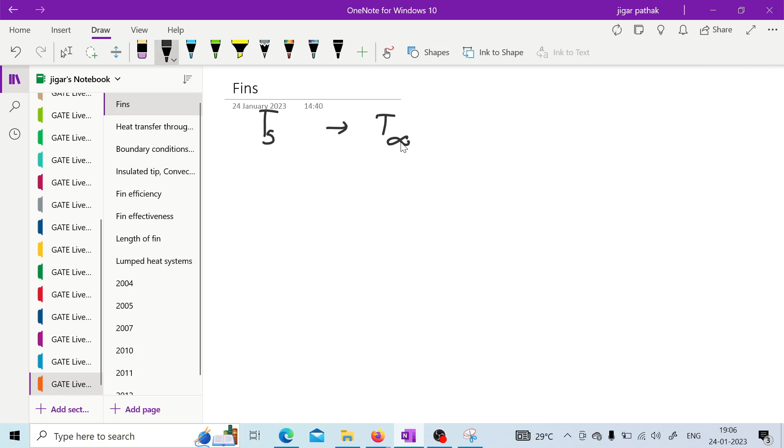As you know, in heat transfer, whenever we are considering convection, the rate of heat transfer from a surface at a particular temperature Ts to the atmosphere, let us say it is at temperature T infinity or T atmospheric, is given by this simple formula: H A delta T, where delta T is Ts minus T infinity.

Now, whenever we want to increase this heat transfer, the options with us are very limited, because Ts and T infinity are pre-decided. We cannot change that. So what we can do to increase the heat transfer is increase this heat transfer coefficient, or we can increase the area.

through which heat transfer is taking place. Generally this increase in H is also not convenient every time, because in case of convection, if we are dealing with gas, then heat transfer coefficient is very less. So in order to go for high heat transfer coefficient, we need to provide some pump or something like that. We need to provide some assistance.

In natural convection, this H is very less. So the only option we have is to increase this area. For that, extended surfaces are used. These extended surfaces are nothing but fins. So this is how fins are important in heat transfer.

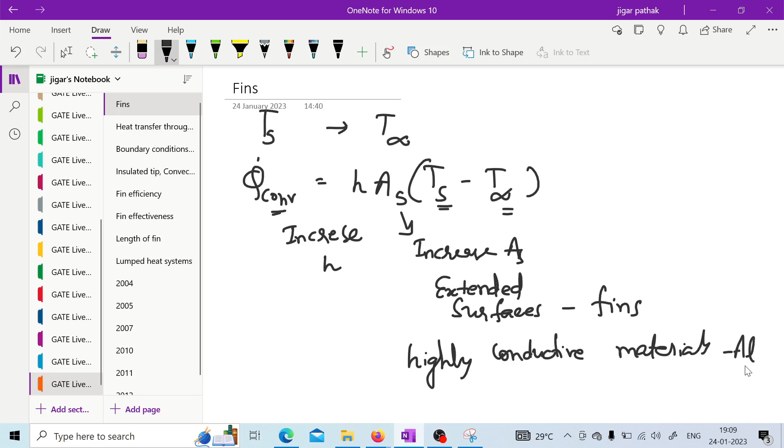You must have seen that engine, or cylinder of that engine, which is surrounded by fins, to increase the heat transfer. Generally these fins are made up of highly conductive materials, like aluminum.

So now if we consider the heat transfer in fins, as you can see here in the given figure, what we can do is we can assume a particular element at a distance x, of length delta x. Then the heat transfer in this particular element is: whatever conductive heat transfer has entered this element at distance x will be transferred to the heat conduction at x plus delta x, and the remaining will be convected to atmosphere.

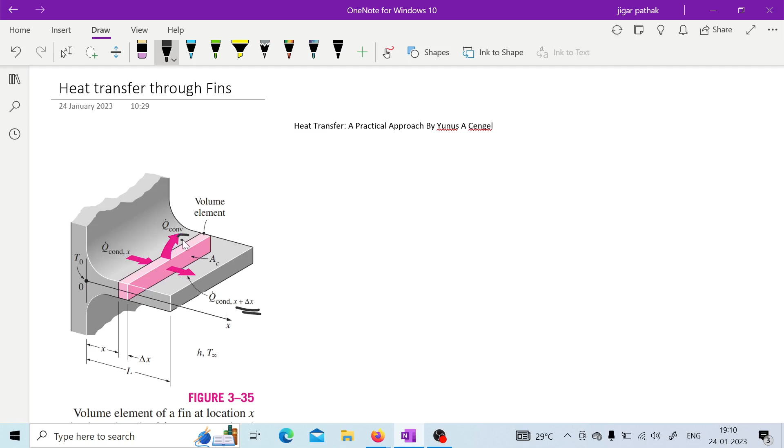So if we write this heat balance, then this Q conduction at x will be equal to the heat transfer rate of conduction at x plus delta x, plus Q convection. So this is how heat balance can be written in this particular case.

Now as we know, this convection is given by H A delta T, where A is nothing but perimeter into this particular length delta x, and here temperature difference is T minus T infinity, which is that atmospheric temperature.

So if we put this value in the above equation, then we will get something like this: heat transfer rate of conduction at x plus delta x, minus Q conduction at x, divided by delta x, plus h p (T minus T infinity) is equal to 0.

Once you have this relation, you can consider that delta x is almost 0, or limit delta x tends to 0. In that case, you can rewrite the above equation as dQ conduction by dx plus h p (T minus T infinity) is equal to 0.

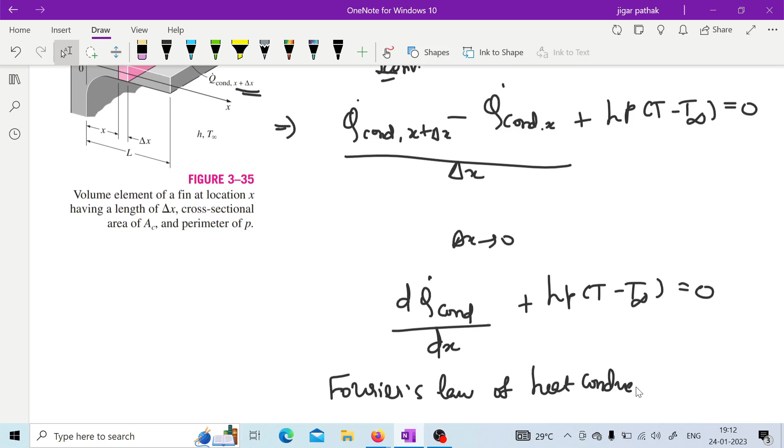So here, what is this conductive heat transfer along the fin? That can also be derived from Fourier's law. What is Fourier's law of heat conduction? Can anyone tell? Q equal to minus k, dT by dx.

As we know, so from that Fourier's law of heat conduction, it can be given by minus K Ac dT by dx. This heat conduction is nothing but K Ac dT by dx. Now if you put this value into the above equation, then you will have something like this.

Now in this equation, generally fins may be of varying cross section as well as varying perimeter throughout its length, but if we consider this cross sectional area and perimeter constant, then this equation can be simplified.

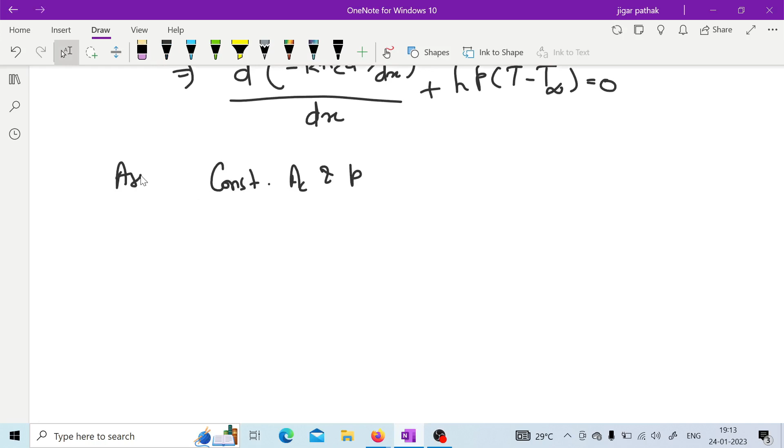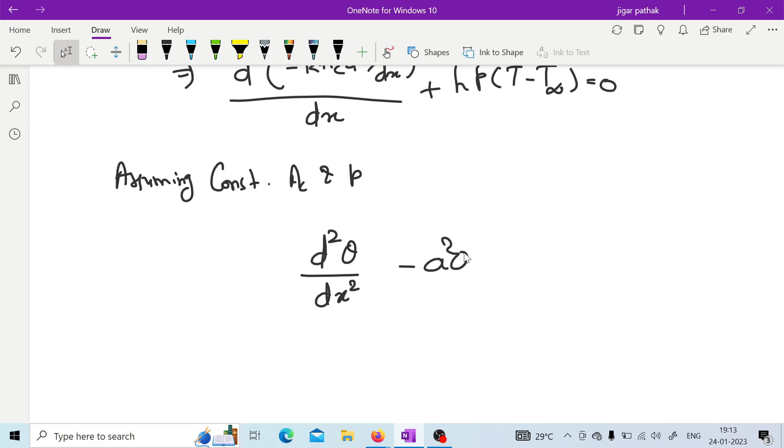By assuming cross sectional area and perimeter constant, you can simplify that relation to d square theta upon dx square minus a square theta equals 0, where a square is nothing but hp upon KAc. So this is how you get this differential equation.

The roots of this differential equation can be given as theta equals c1 e raised to ax plus c2 e raised to minus ax. If you apply boundary conditions, you can come to the specific solution. This is the general solution.

At x equal to 0, we are having the base of the fin, so at the base, at x equal to 0, this temperature T is equal to TB. If you put this boundary condition into the equation, you will find theta 0 equals TB minus T infinite. So at x equal to 0, theta 0 is nothing but theta b.

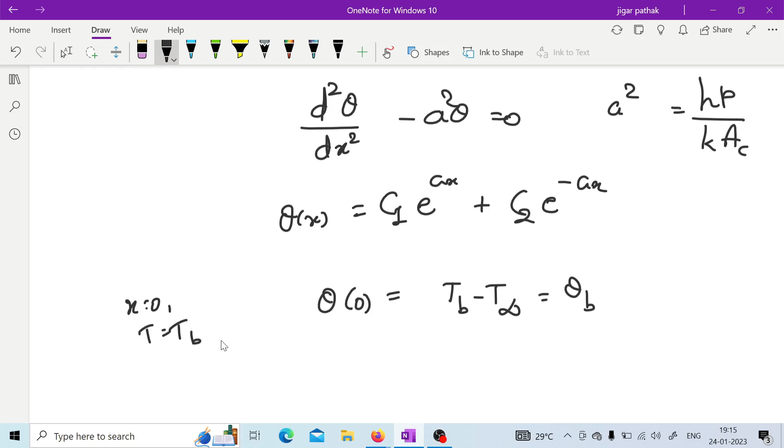Now in order to have the other boundary condition, at x equal to 0 the temperature is equal to base temperature, because in this fin, at x equal to 0, this is base temperature. The other boundary condition will be at x equal to L.

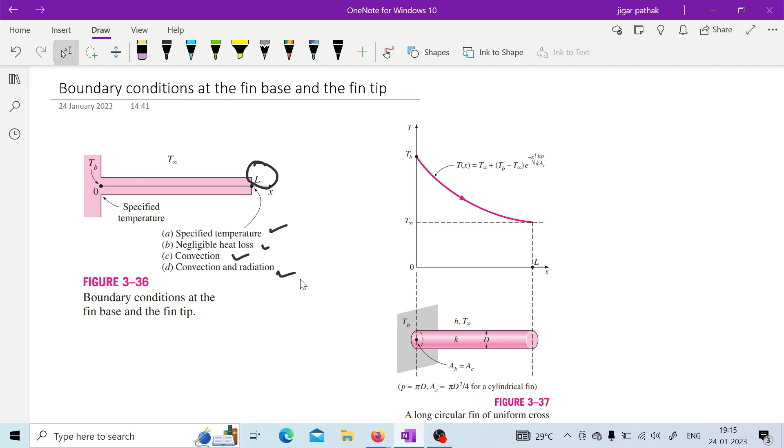For that boundary condition at x equal to L, we are having 3 or 4 different cases. We can have specified temperature, negligible heat loss, convection, or convection and radiation both. We are considering all these cases one by one.

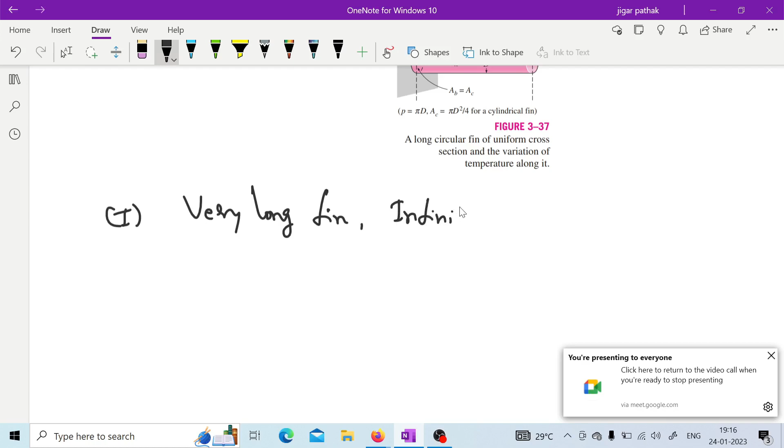So first case, if we consider a very long fin, let us say infinite length, then what is going to happen is at infinite length, the temperature will of course be equal to the ambient temperature. So TL will be equal to T infinite, the ambient temperature at that length, for a very long length. So theta L equals TL minus T infinite equals 0, as L goes to infinity.

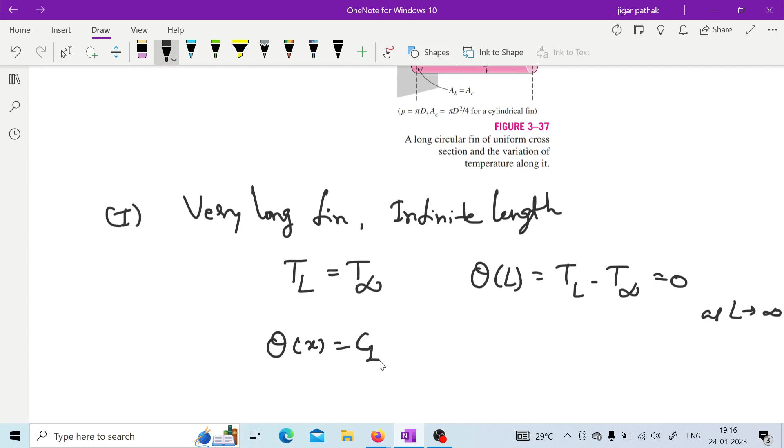If you put this particular condition into theta x equals c1 e raised to ax plus c2 e raised to minus ax, only one element will take part because the other term will go to infinity, so that is not a feasible solution. For infinite length, theta x will be given by only this element, c2 e raised to minus ax. As we already put the boundary condition at x equal to 0, we found this constant is theta b, so the equation reduces to theta x equals theta b e raised to minus ax.

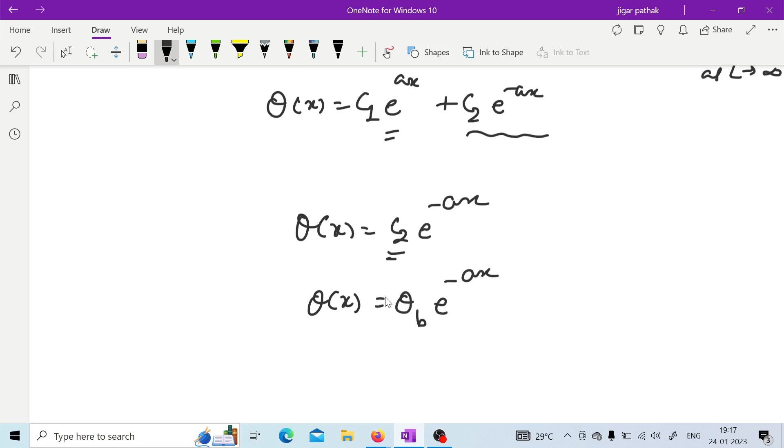Now as you know, theta is the temperature difference. Theta x is the temperature difference, so Tx minus T infinite upon Tb minus T infinite will be given as e raised to minus x into a, where a is Hp by Kac.

So for a very long fin, as we know this particular equation for temperature difference, heat transfer for a very long fin can then be calculated using this relation, dt by dx, at x equal to 0.

If you consider this and put all values from the above equation at x equal to 0, you will have dt by dx at x equal to 0. If you differentiate both sides, you will find the value of dt by dx at x equal to 0, and if you put it here, it simplifies to root Hp Kac.

Into Tb minus T infinite, because here you will have minus A e raised to minus Ax, where A is again Hp by Kac, so if you put Hp by Ka, the root Hp remains as it is, and root Ka is simplified, so root Hp into Kac comes into the picture.

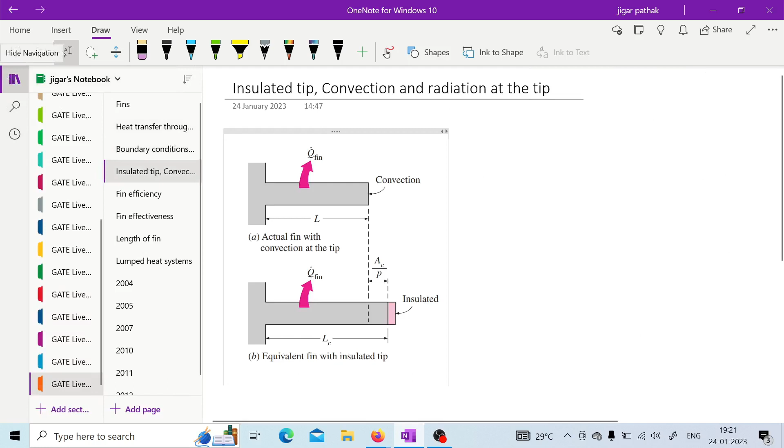Now once you have idea about this heat transfer at a very long fin, you can consider some other cases. The second case is insulated tip.

For insulated tip, heat transfer will be zero. This is the third case. This figure belongs to the third case where convection is allowed. The second case is where this tip is insulated.

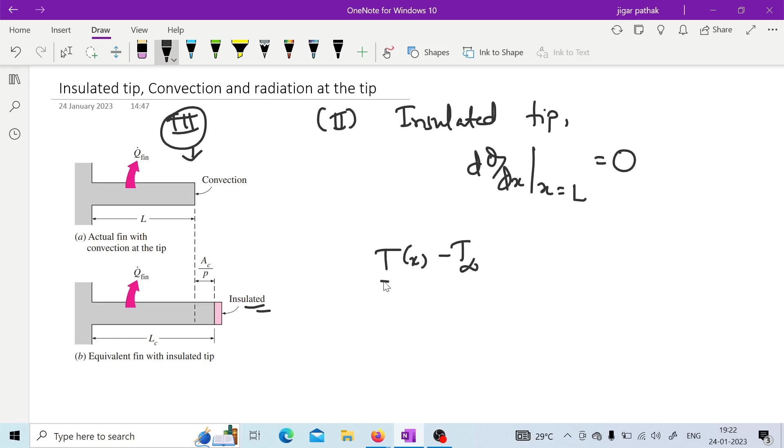In that case, d theta by dx at x equal to L will be 0 because heat transfer will be 0. So in that case, the temperature distribution results in this relation, which can be given for the case of insulated tip.

And the heat transfer in this insulated tip will be given by minus Ka dt by dx at x equal to 0. Again it will result in the same hp kac Tb minus T infinity into tanh aL. So this is how you get the heat transfer in an insulated tip.

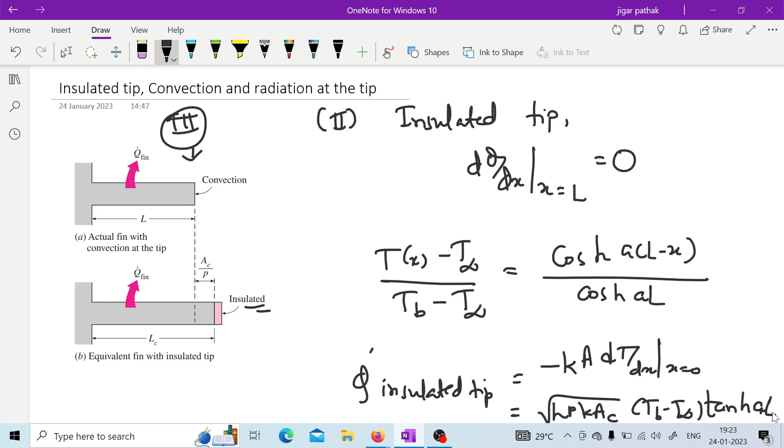Now once you have idea about both of these, you need to check the last case, that is convection allowed at the tip of the fin.

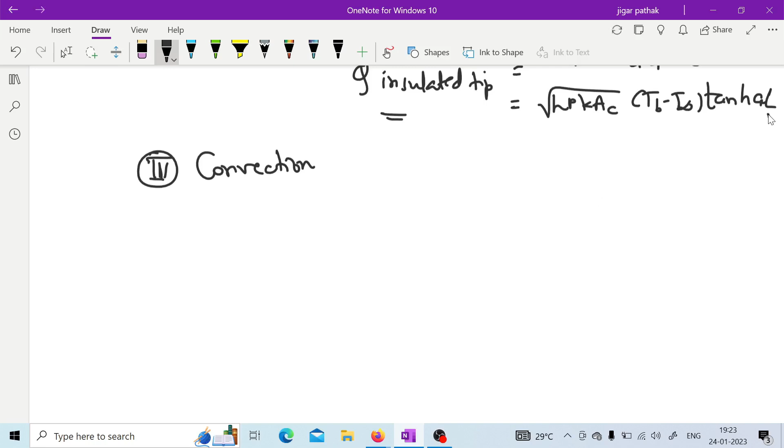When convection is allowed at the tip of the fin, what we do is assume the same as insulated tip, but here the L we use in the insulated tip case is changed from L to L plus Ac by P, this characteristic length we use in case of convection at the tip.

So if you consider any rectangular fin and calculate this Lc, it comes to L plus t by 2. Or if you go for any cylindrical fin, then you will have Lc equal to L plus D by 4. Ac is the cross-sectional area and P is the perimeter.

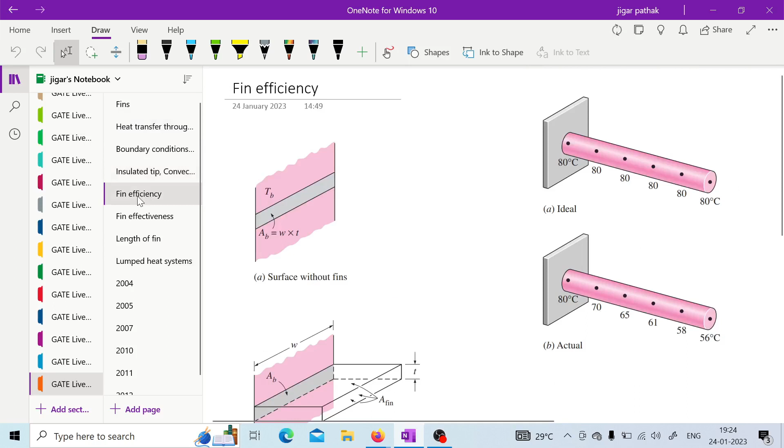So this is how you get the heat transfer and temperature distribution along the fin. Now apart from this heat transfer and temperature distribution in the fin, you must also have idea about fin efficiency as well as fin effectiveness. So first we will see what is fin efficiency, and then we will see effectiveness.

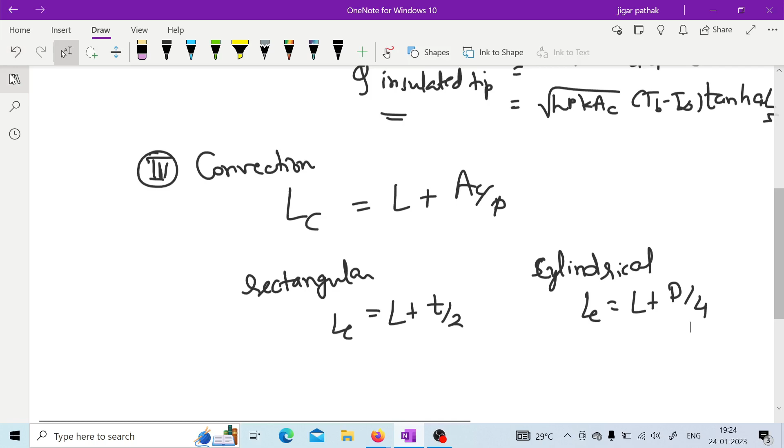So fin efficiency means, as you can see... yes, please can you go to the previous slide? Yes. Hmm. Yes. No, thank you sir, okay. Sir, yes.

It's an insulated tip, instead of L we place Lc, and we get the temperature. We are using this characteristic length. So in second case, yes, we are using this characteristic length. So for convection we are increasing the length for the insulated tip.

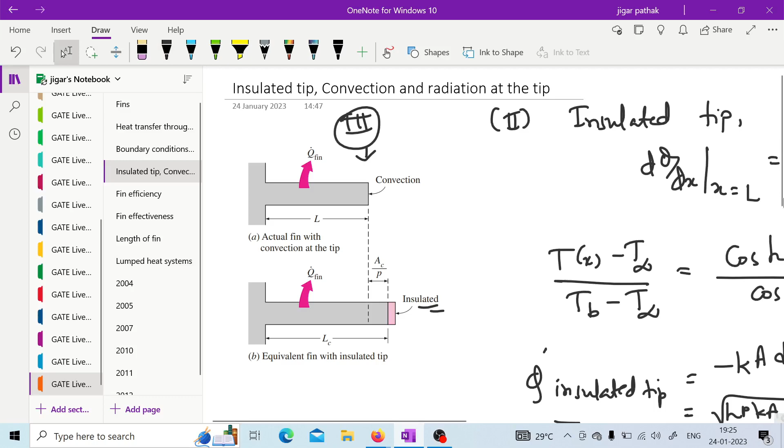Okay, so once you have idea about this, then we can go for this efficiency and effectiveness of fin.

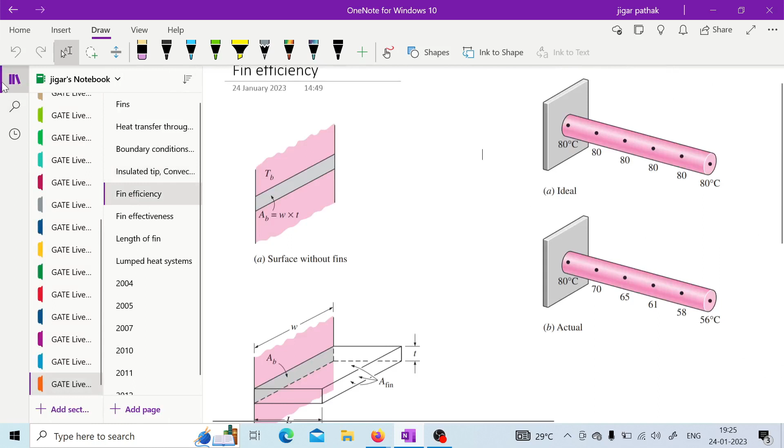Basically efficiency of fin is what - as you know, you have this base area without fin, and if you provide fin, you have the surface with fin with increased area. In case of efficiency of fin, when adding fin to any surface, the ideal situation is the fin must be at the same temperature throughout. But in actual practice it is not possible. Fin cannot be at the same temperature.

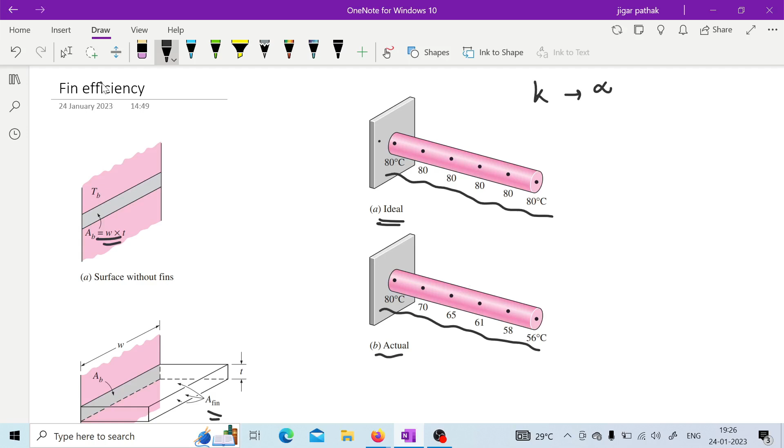Why can it not be at same temperature? Because the material must have some thermal conductivity. If the material has infinite thermal conductivity, then the temperature can be the same throughout that solid body, but we don't have that material. So in actual practice we have distributed temperature along the length of fin, and because of that maximum heat transfer cannot take place. That is why this efficiency of fin comes into picture.

So how is efficiency of fin defined? First you have to have idea about the maximum heat transfer rate through a fin, which is given by H into area of fin into base temperature minus atmospheric temperature. Once you have idea about this maximum heat transfer rate, you can define efficiency of fin as the actual heat transfer through fin upon the maximum heat transfer through fin.

This is the actual heat transfer, and this is the maximum heat transfer when we consider that the whole fin is at base temperature. So this is how efficiency of fin is defined.

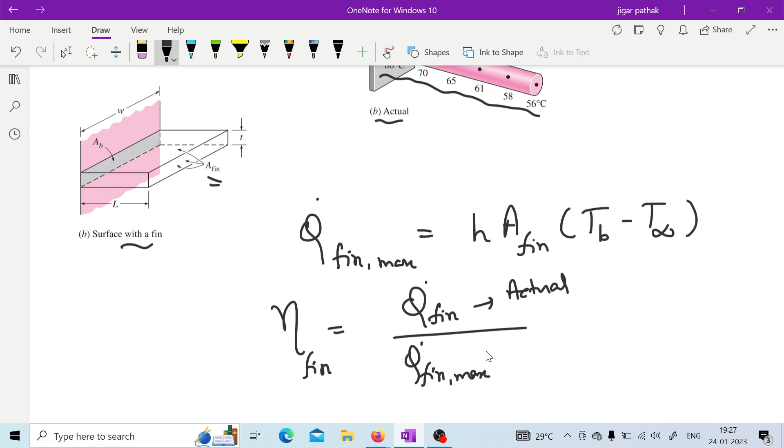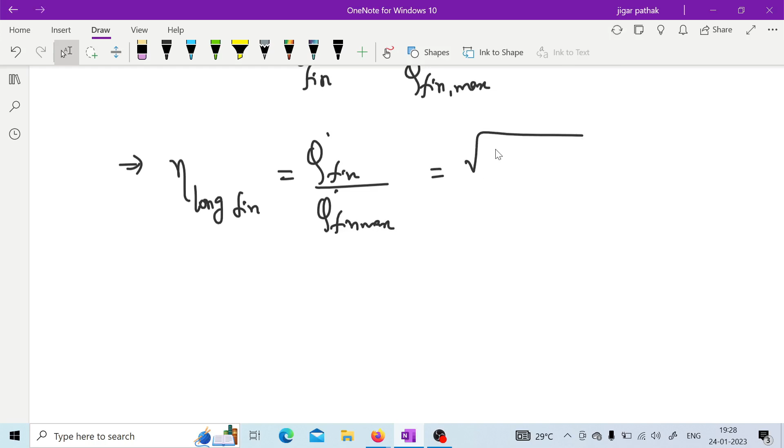Now if you consider the efficiency for the long fin and the different cases we considered, for the very long fin or infinite fin, it is given by Q fin upon Q fin maximum. Q fin we derived for this particular long fin case is H P K A c, TB minus T infinite.

Now once you have the maximum heat transfer rate, that will be given by H A fin into TB minus T infinite. If you simplify this, A fin can be written as P into length of fin.

A fin can be written as P into L. So if you put A fin as P into L and simplify, what you get is 1 upon L, under root KAc upon HP. This HP upon KA is nothing but m, which we defined earlier - m squared equals HP by KA, so m is under root HP by KA. So efficiency of long fin is given by 1 upon mL.

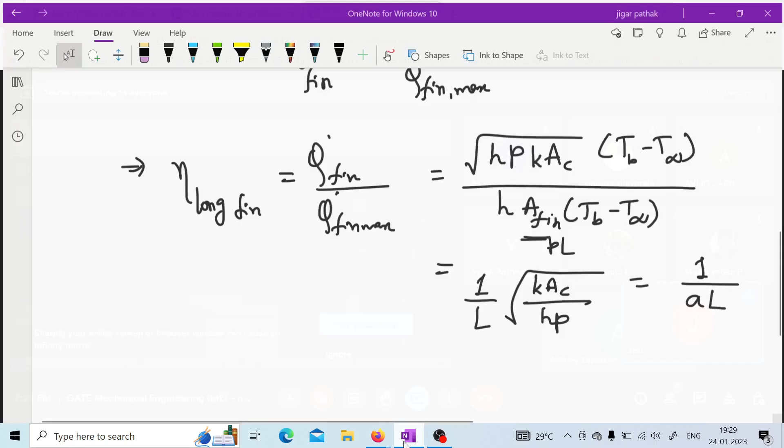Actually the best book to study this topic is - I am discussing it from Yunus Cengel, so you can check that. I have written it on the first page also - Heat Transfer: A Practical Approach by Yunus Cengel.

Did you get this? Whoever has typed message.

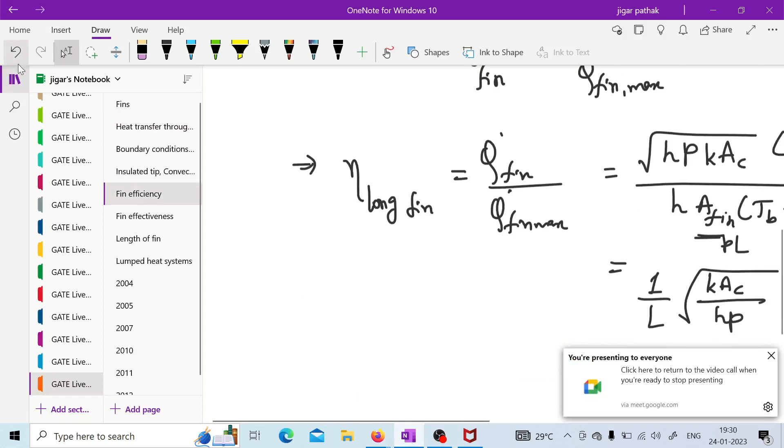Okay, okay, so yeah, now let us go ahead. We were discussing this efficiency, right? So this is for that infinite length.

Now for the third case, you just need to replace L with Lc, for the case with convective tip - you can have convection at the end of tip. So this is how you are having efficiency in your fin.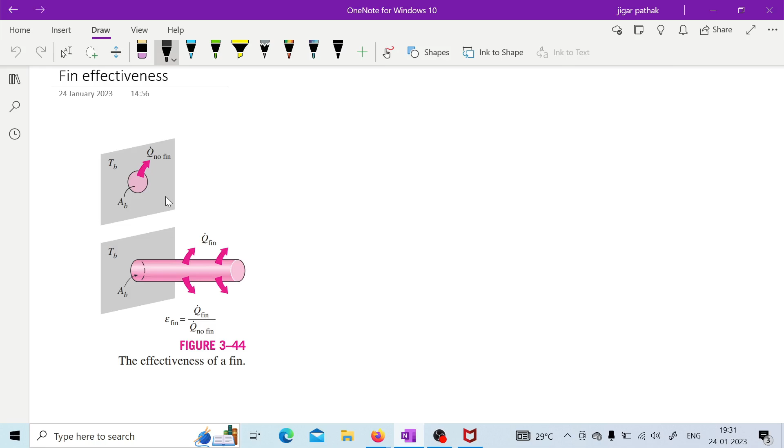Now after efficiency, you must also have idea about the effectiveness of fin. Effectiveness means what change, or how effectively the fin is increasing the heat transfer. That is basically effectiveness of this fin. So effectiveness of fin is defined as Q with fin upon Q without fin, when no fin is provided, so this ratio must be greater than 1.

Then only - sir, yeah, can you go back to the previous slide, sir? I had a power cut. Sorry, yeah, can you go back to the previous? Yes. Okay sir, thanks, okay.

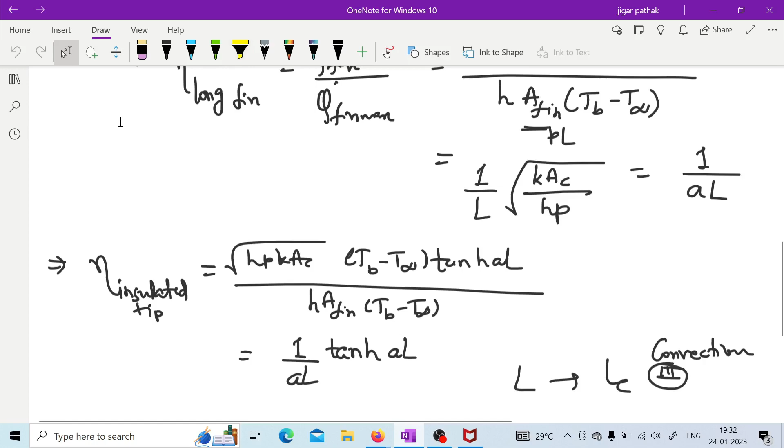So effectiveness of fin is, as we have already defined, that the heat transfer must be increased after the addition of fin, then only this is justified, right? Effectiveness of fin shows how the heat transfer rate is increased, so it must be greater than 1.

Effectiveness of fin is defined as heat transfer with fin divided by heat transfer without fin, or in absence of fin. So the actual heat transfer through fin is given by efficiency of fin into the maximum heat transfer through fin, which we have written just now. This way you can represent actual heat transfer through fin using efficiency and maximum heat transfer. Q without fin can simply be written as HAB, only base area will be there.

So this way you can define your effectiveness of fin: basically area of fin divided by base area into efficiency of fin. This will define the effectiveness of fin. Here also you can write this for different cases.

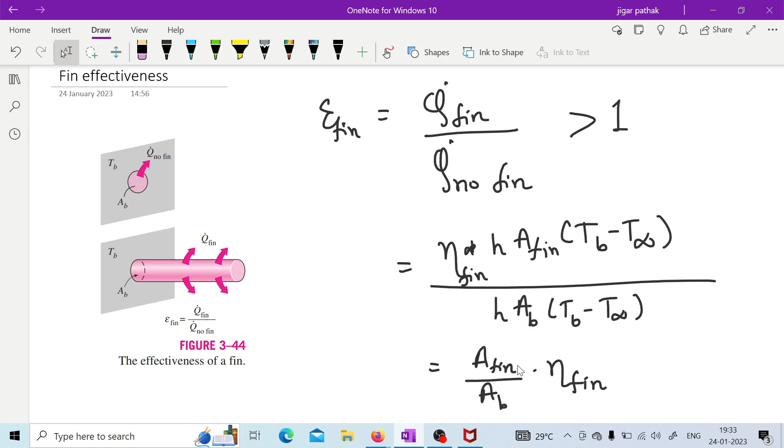Let us write for the long fin or infinite long fin how effectiveness will be calculated. For long fin you can write HPKA, and here you will have HP, and as we know, almost this base area is equal to the cross section area of the fin. So you can come up with a simplification like KP upon HAC. This is how effectiveness in long fin is defined.

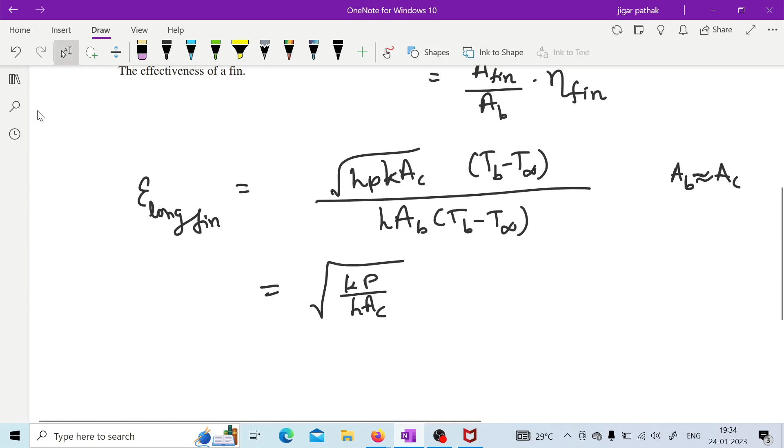So these are some of the important things related to the fin: temperature distribution in fin, heat transfer rate in fin, effectiveness of fin, and efficiency of fin. Now one more important thing is, the length of fin needs to be defined.

How you are going to define the length of fin is: after a certain point of time there is no heat transfer through fin. Why? Because at a certain length of the fin the temperature already reaches the temperature of the ambience. As we have seen in the efficiency slide, we showed the ideal case or actual case, where this temperature is decreasing throughout the length, or across the length, of the fin.

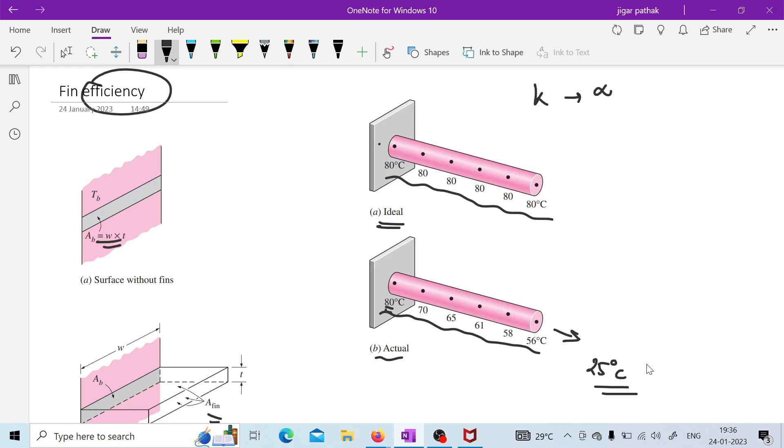So it is always important to decide the length of fin, or the optimized length, or proper length of fin, because if you go on increasing this length, at a certain point, if ambience temperature is 25 degrees centigrade, the fin itself may reach the temperature of 25 degrees centigrade. After that point, if you keep increasing the fin length, it is not going to take part in any heat transfer. It is obvious, right? Yes, sir. Okay, so that is why it is always advisable to define this length of fin.

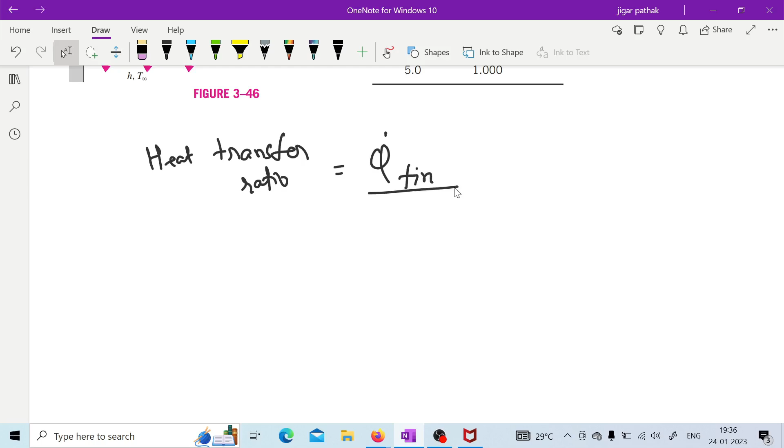So here is one example they have considered, and how they have come up with this calculation: they have considered the heat transfer ratio. Let me define that heat transfer ratio. This heat transfer ratio is nothing but the heat transfer through fin divided by the heat transfer through the long fin.

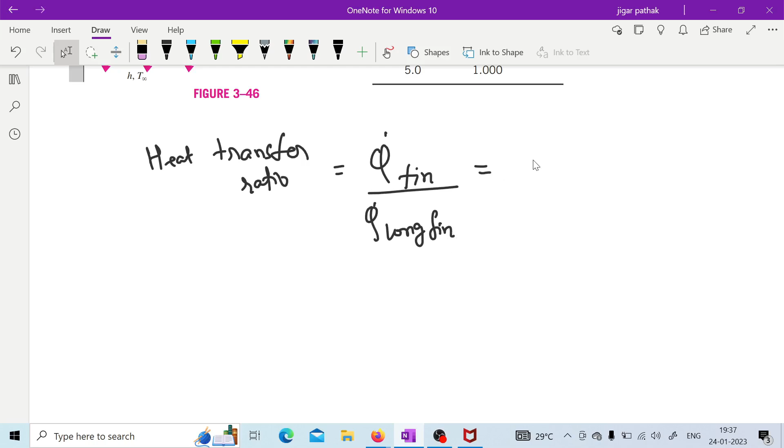So if you write the actual heat transfer through fin as we calculated for the short tip with convection at end using this relation, and the long fin or infinite fin having HPKA into T b minus T infinite, this will give you tan hyperbolic of aL itself. That is why they have considered this particular factor, tan hyperbolic of aL.

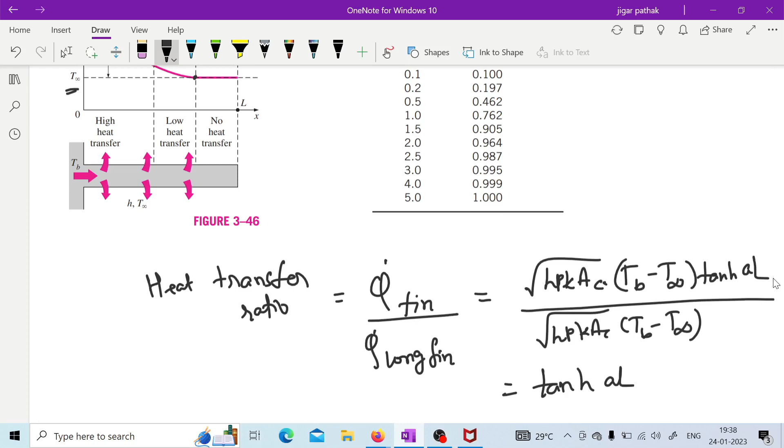LC, sorry? For insulated tip ends, sorry? LC, sir, tan hyperbolic of ALC. Tan hyperbolic of AL. LC, characteristic length. Here, in case of the short fin, it must be the characteristic length as we have decided, yes correct, that is what you were asking, right? Yes sir. Okay yes, but basically it is tan hyperbolic of AL.

So if you keep on increasing the length, what happens is, as you can observe, at AL of 5 you are getting the value tan hyperbolic AL as 1. It means both cases give the same result, meaning the finite length is equal to infinite length at AL equal to 5. So after this point there is no point in increasing the length of fin.

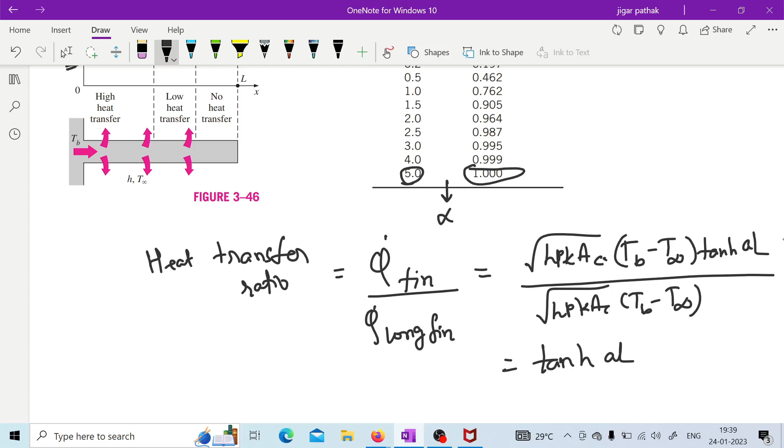Apart from this, one more observation you can make in this given example is, if you see at AL equal to 2.5, at that particular length, this value is almost 99%, right, 0.987.

It is almost 99%, and here it is 100%. So from here to here only 1% change in heat transfer rate is there. So in order to get 1 more percent of heat transfer rate, your material gets doubled, if you are using that doubled length. So in that case we can also take this as length instead of this. So this is how length of fin is decided. So are you getting what we are discussing?

Okay, yes sir. Up to here we are putting it. Sorry? Miss, can you repeat that point up to which we are fixing?

We are fixing at this 2.5, because from 2.5 to 5 there is only 1% increase in heat transfer rate, while our material will be almost doubled because the length will be almost double reaching from 2.5 to 5. We are using this certain length of this fin. So at 2.5 we are having 99% of heat transfer, and for this remaining 2.5 that other 1% of heat transfer is there. So we can sacrifice this 1% of heat transfer rate in order to save the material. Are you getting?

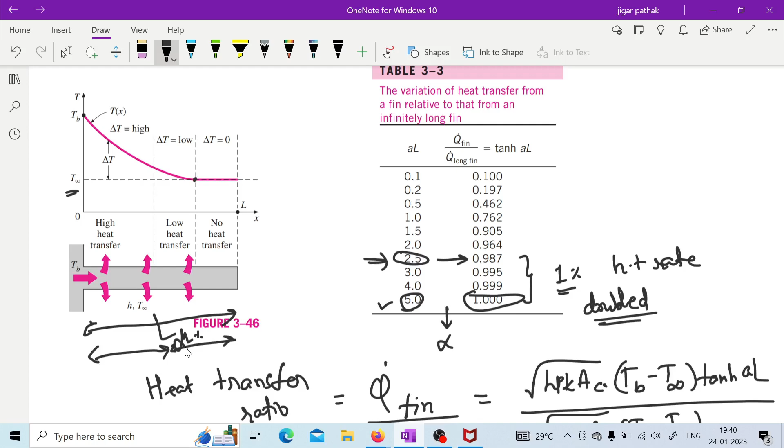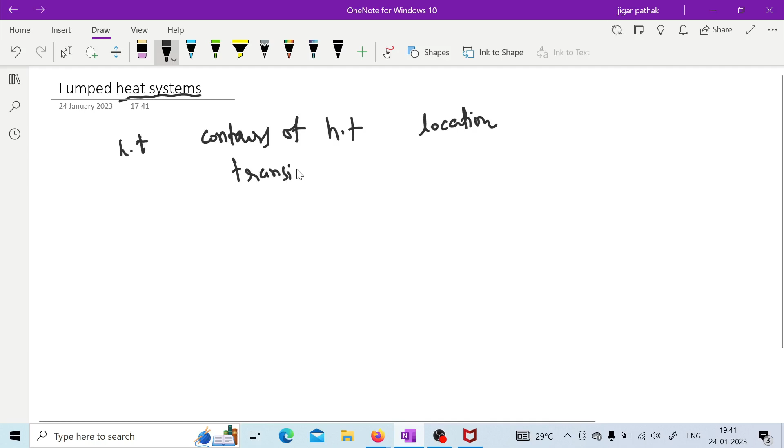Yes sir, okay. So now, apart from fin, one more thing we are going to discuss, that is lumped heat systems. Lumped heat systems means while this heat transfer, generally we are considering contours of heat transfer. It also changes with location, or spatially it is going to change. And the other is transient, meaning with respect to time it is going to change.

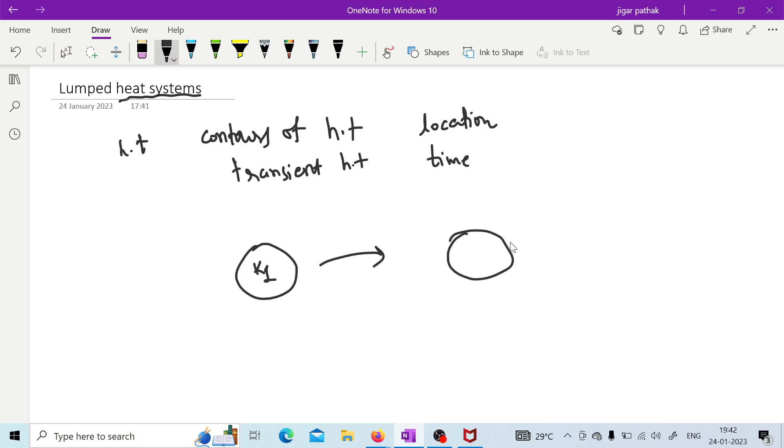So with respect to location and with respect to time, heat is going to change. So what happens is, in some examples you can have the same temperature throughout the body of your object. Suppose if you consider a particular ball, made up of material having conductivity K1, if you are taking it out from a microwave oven, then it will be at a certain temperature.

Now this K1 is so high that the temperature is almost same throughout the body. While in other case, the conductivity of material is K2, and you are having the same dimension ball of that material with conductivity K2, which is actually having contours of temperature. It is not having the same temperature throughout the body when you are taking it out from the oven, because the heat has not conducted throughout the body at this instant when it is supplied to the body. Actually, in the oven, heat is supplied to this body through the surroundings. So this is how, if the conductivity is too high, then the full body will be at the same temperature after a certain point of time, while for some materials it is not possible.

So in the material where the body is at the same temperature throughout, for that we can go for this lumped heat analysis, or those are called lumped systems. We will also see how we can identify whether the system is a lumped system or not.

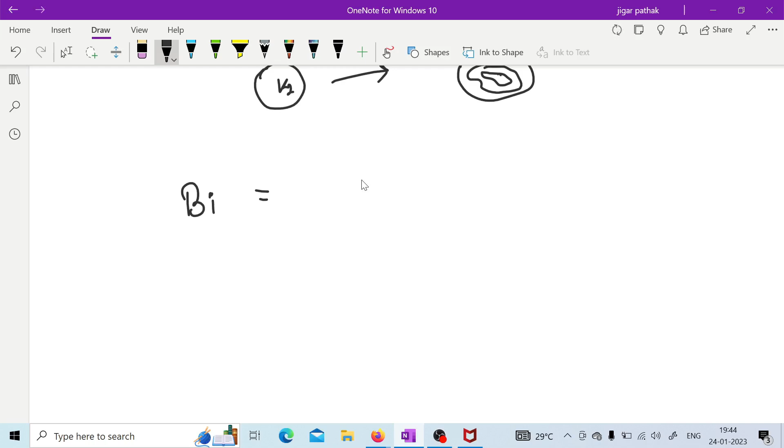So actually for that, what you need to do is first check the Biot number in order to check whether the system is a lumped system or not. So Biot number is nothing but convection at the surface divided by conduction within the body. So basically, if you write this, you can come up with HLC by K, where this LC is characteristic length, which can be calculated by volume upon surface area.

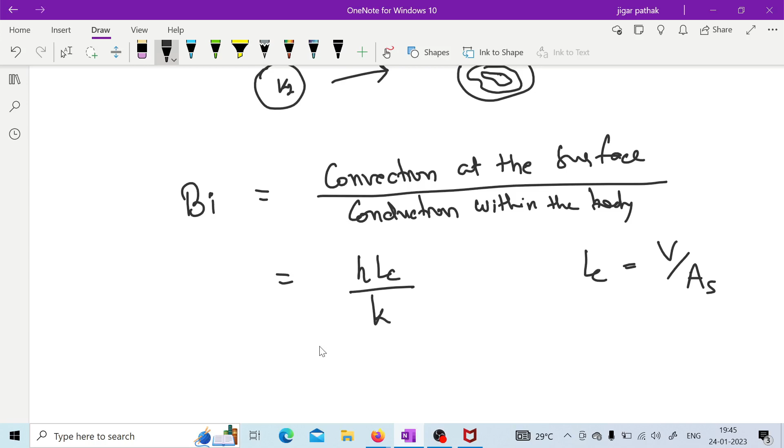So here this convection is H A delta T, and here it is K A dT by dx. This is simplified to HLC by K. So this is known as Biot number, and here it is written in terms of convection and conduction. If you go and write it in terms of conduction resistance and convection resistance, then it will be reversed, because conduction resistance is LC by K and convective resistance is 1 upon H. So it can also be written in terms of conductive resistance and convective resistance.

So basically this Biot number says how conductive your material is, how predominant conduction is. If your conduction is very much high or very predominant, then it will almost go to infinity, as we have seen in that fin, that if the fin is at the same base temperature throughout, then it will give the highest efficiency. For that we need K to infinity.

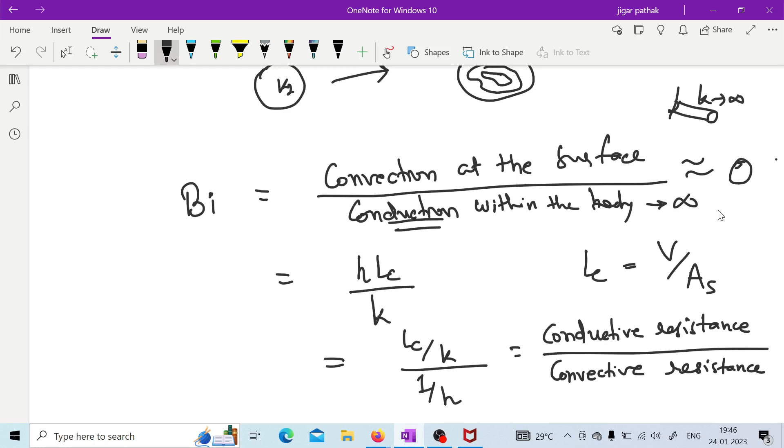So here also, if your conduction is almost up to infinite, then this Biot number will tend to 0. In that case, this lumped system will give the perfect result. But if Biot number is less than or equal to 0.1, in that case also you can have some approximate result, and you can have some accuracy with which you can predict your heat transfer.

So when you consider this lumped system, you need to consider only the change with respect to time, and you need not see whether the temperature difference exists with location or position, because we are considering that it will be same throughout. So when Biot number is less than or equal to 0.1, you can go for this lumped analysis.

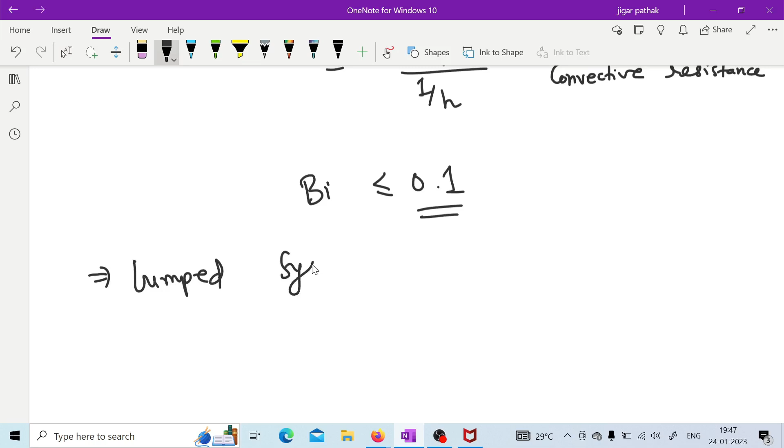So when you go for this lumped system analysis, what happens is heat is transferred into the body during the time dt, as we have seen in that example of providing heat through an oven.

And due to that there is increase in the energy of the body during the same time dt.

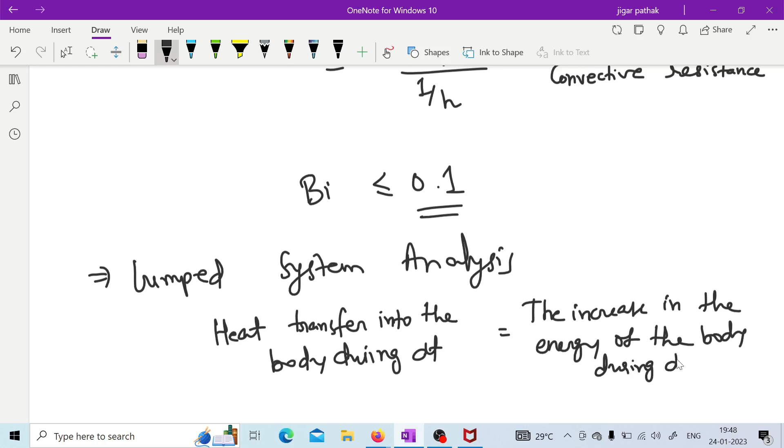So if you provide further simplification, then it is nothing but h into as into t infinite minus t, dt equals mcp dt. Here this dt is related to the time, and this d(theta) is related to the temperature difference. You can further simplify by putting this m as rho into v, and your theta is nothing but t minus t infinite.

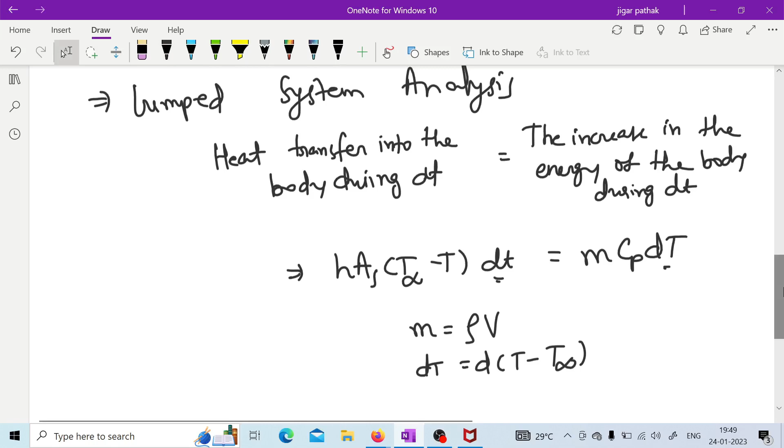So if you do these changes, and if you further rearrange the given equation by putting this value into the above equation, you can rearrange it like this: t minus t infinity.

Nusselt number also the same way. How is Biot number different from Nusselt's number? Actually Nusselt number and all are related to that. What you can say? Hello. Nusselt number is related to the fluids. Yeah, Ks means thermal conductivity of the solid. Yes, correct.

So here this we can rearrange it as d(theta) upon theta, which is t minus t infinite, equals minus h as upon rho v cp. Here this negative sign has come because we changed t infinity minus t to t minus t infinity.

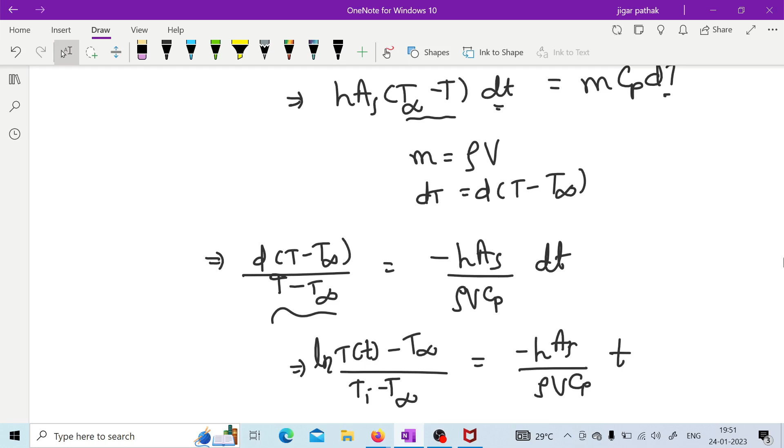So this is how after simplification you can give it like this, and then you can integrate it from the temperature at initial position Ti to a particular time t. If you integrate with these limits, you will find this relation. So now if you further simplify it and write it in terms of temperature difference at a particular point of time, that is theta, which you may be interested in, you can calculate it with this relation.

So this HAS upon rho VCP can be considered as a time constant. You can write HAS upon rho VCP as a constant B, which is nothing but the time constant. So it can be written as theta equals theta_i e raised to minus Bt.

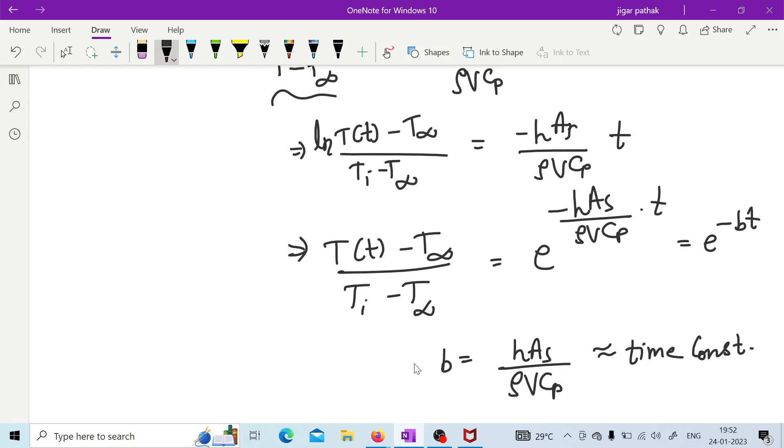So this is how you are having these two different analyses, in terms of temperature distribution and heat transfer rate, in case of lumped system analysis and heat transfer through fins, as we have seen. So generally this is important from the GATE point of view. They may ask some questions regarding that. We will see some of the questions asked in previous GATE question papers.

Sir, yeah. In that previous formula, is the time constant rho Vc by Ha, or Ha upon rho Vc? HA upon rho VCP. Then there will be e raised to that.

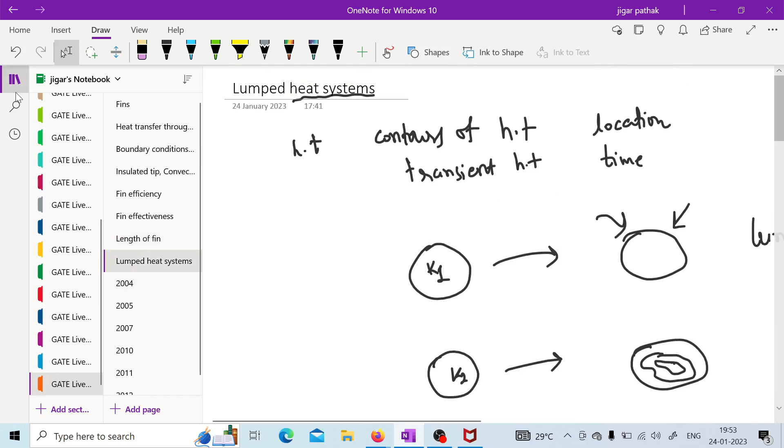Does the time constant have units or not? That I need to check. You can check actually, because e raised to something should be a unitless quantity. I thought e raised to the power of something, that something should not have any units. That I also need to check whether it has any unit or not. You can check, but I guess how you can check that.

You can put units of each and every thing, right? What is the unit of H? Watt per meter square per Kelvin. Let us check, one second. Watt per meter square Kelvin. What is area? Meter square. Then what is rho?

Kg per meter cube, and volume in meter cube. What is CP? Kilojoule per kg Kelvin, or joule per kg Kelvin. So meter cube can be cancelled, this can be cancelled, this Kelvin can be cancelled, kg also. So it is unitless, right?

This watt and joule are also work units, correct? No, watt is joule per second. Per unit time. 1 by S. So here this t will be cancelled, that second will remain, whatever is remaining here. Correct, that will be joule per second. Here it is kilojoule, so that second will be cancelled to this second. Means time constant has unit per second.

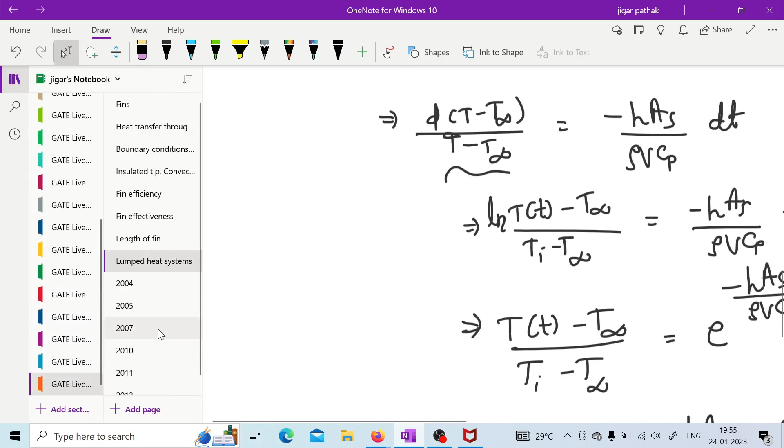Okay, so is it clear now? Clear, sir, but as the name suggests time constant, so I thought it should be also in second. It should be also in second? But here it is second inverse. That is why you are telling the time constant is rho V CP upon H As. Maybe then you will be correct, I will check.

Okay, now let us go to this previous year question from GATE 2004: a spherical thermocouple junction of diameter 0.706 mm is to be used for the measurement of temperature of a gas stream. The convective heat transfer coefficient on the bead surface is 400 watt per meter square Kelvin. Thermophysical properties of thermocouple material are K equal to 20 watt per meter Kelvin, CP given as 400 joule per kgK, and rho is 8500 kg per meter cube. The thermocouple initially at 30 degree centigrade is placed in a hot stream of 300 degree centigrade. Find the time taken by the bead to reach 298 degree centigrade.

Can you try this question? Please try this, I guess you will be able to solve this. First, you need to check whether lumped analysis is possible or not.

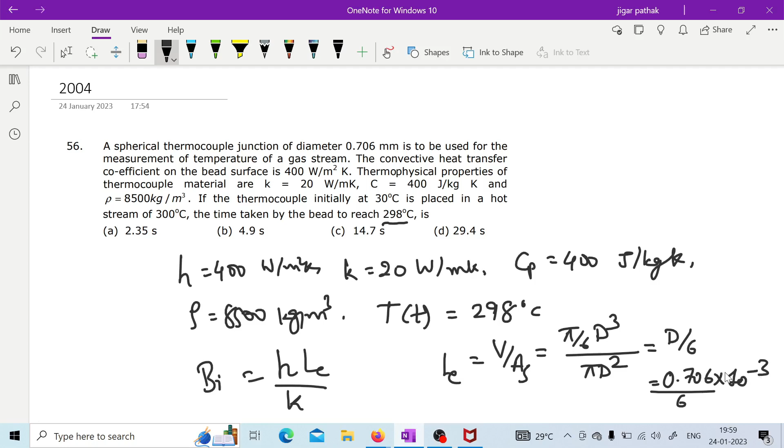So your characteristic length is 0.706 by 6 into 10 raised to minus 3 meter. So if you put all this value into the Biot number, H is 400, LC is 0.706 by 6 into 10 raised to minus 3, and K is 20, so it is coming 0.0023. All of you are getting this? Yes, sir, so it is a lumped system.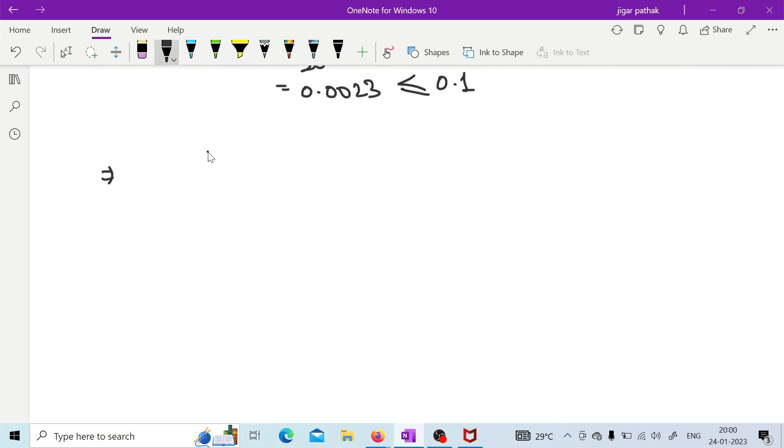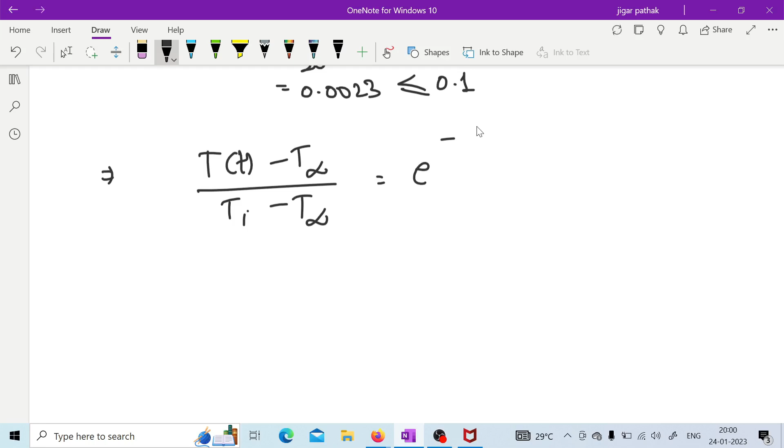So now you can go for that time calculation. For that you can use the temperature distribution equation which we have derived just now: T minus T infinity upon Ti minus T infinity is equal to e raised to minus H A S upon rho V Cp into T, correct?

So here you are having all the data with you, right? This temperature is given as 298, this is 300, this is 30, this is 300, e raised to minus, H is 400, then V by As directly you can write, that is 0.706 by 6 into 10 raised to minus 3, and then rho is given as 8500, and here the CP is also given as 400, into T. So this will give you T. So can anyone tell what is the answer?

Sir, what is CP? CP is this 400.

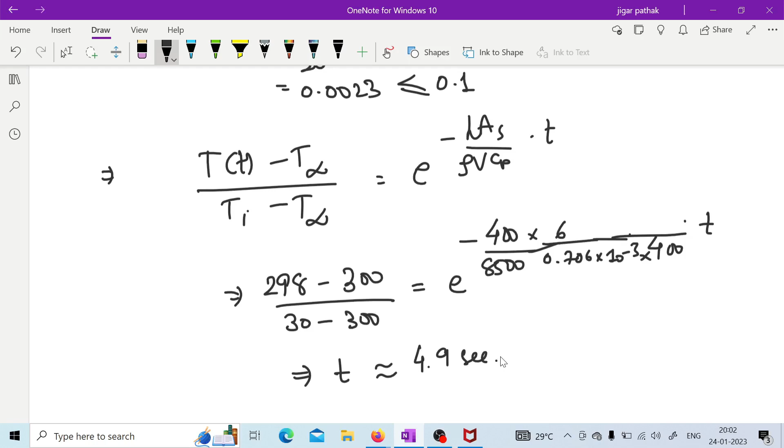So what is T? Can anyone tell the answer? 4.9 second is the answer, right? So it must be given in the option, I guess. So this is the correct answer.

Now if we go to the next one: a small copper ball of 5 mm diameter at 500 Kelvin is dropped into an oil bath whose temperature is 300 Kelvin. The thermal conductivity of copper is 400 watt per meter Kelvin, its density is 9000 kg per meter cube, and its specific heat is 385 joule per kg Kelvin. The heat transfer coefficient is 250 watt per meter square Kelvin, and lumped analysis is assumed to be valid.

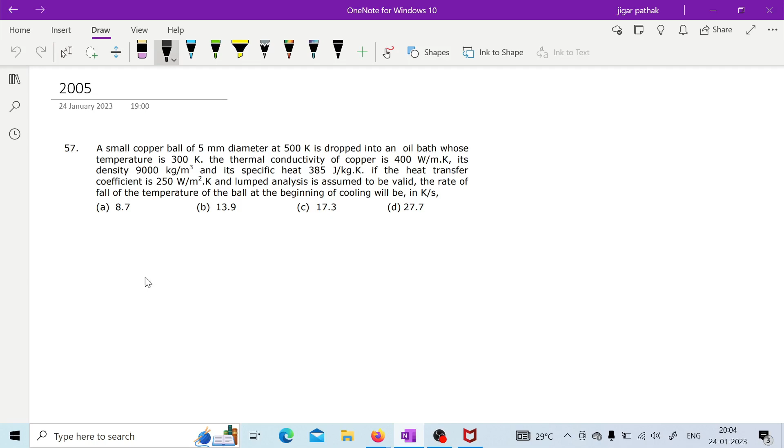Here you are already told that lumped analysis is there, so you need to find the rate of fall of temperature of the ball at the beginning of cooling, meaning at T equal to 0. But for that, first you need to write that equation.

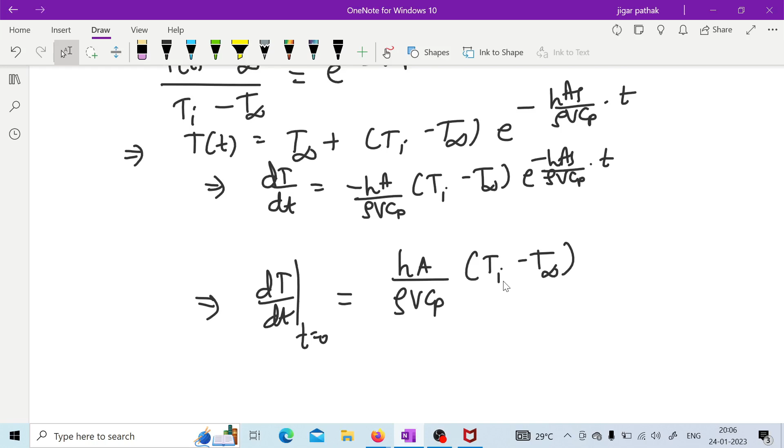Can you calculate this? Hello? Yes sir, please calculate. Sir, please show the data. Yeah, you can have the data.

If you write the data: K is given as 400 watt per meter Kelvin, Ti is 500 Kelvin, rho is 9000 kg per meter cube, T infinity is 300 Kelvin, Cp is 385 joule per kg Kelvin, and H is given as 250 watt per meter square Kelvin.

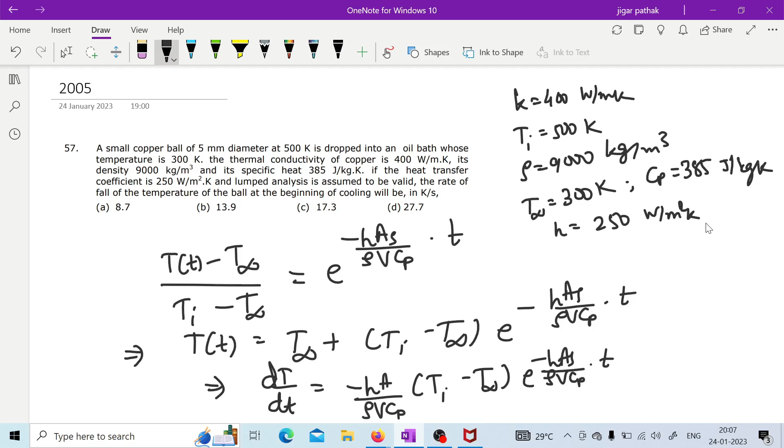Now if you put all these values: H is given as 250. V by A can here also be written as D by 6, right? D is given as 0.005, so V by A I will write as 0.005 divided by 6, and rho is given as 9000.

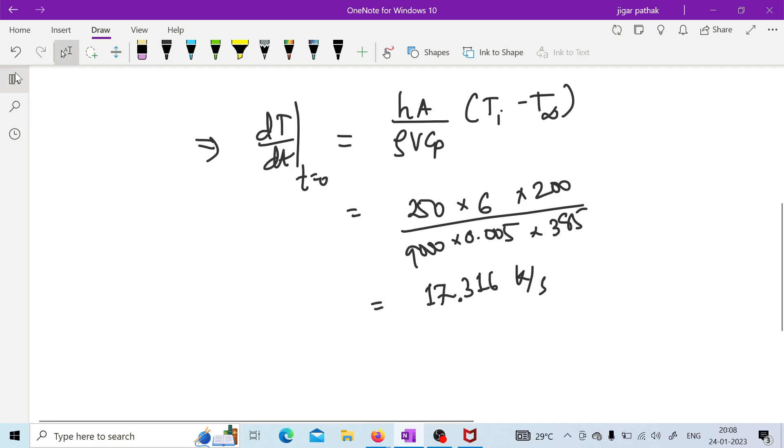Sir, is it 17.316? Yes, correct. So this is how, if you put all these values, you will find it as 17.316 Kelvin per second at t equal to 0. This is how you can get this rate of change.

The next problem: the average heat transfer coefficient on a thin hot vertical plate suspended in still air can be determined from observations of the change in plate temperature with time as it cools. Assume the plate temperature to be uniform at any instant, and radiation heat exchange with surroundings is negligible. The ambient temperature is 25 degrees centigrade. The plate has a total surface area of 0.1 meter square and a mass of 4 kg. The specific heat of the plate material is 2.5 kJ per kg Kelvin. The convective heat transfer coefficient in watt per meter square Kelvin, at the instant when the plate temperature is 225 degrees centigrade and the change in plate temperature with time dT by dt is minus 0.02 Kelvin per second, is to be found.

So can you try it by yourself? Sir, means by we here also the same equation, and we have to find H.

Yes, you can go by that, but here I guess you can better go with that simple equation with which we started: that convective heat transfer from the system will be h A times T minus Tf, and heat lost by the system as m cp dT by dt. Here actually it is a rate, so this dT by dt I have shifted here, so you can try with this.

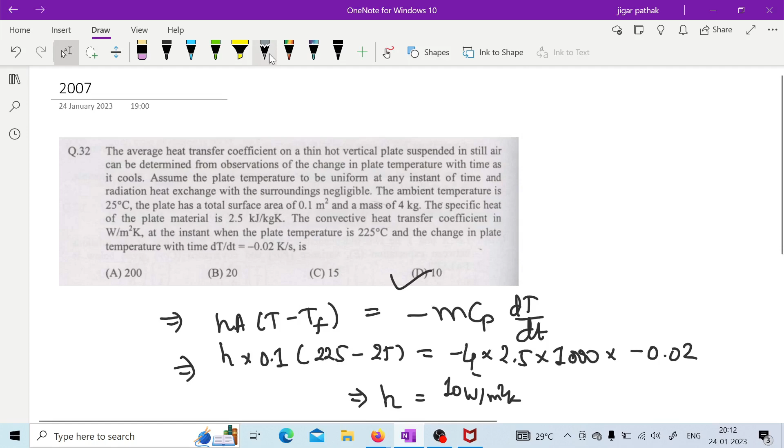Okay, now next let's see. A fin has 5 mm diameter and 100 mm length. The thermal conductivity of fin material is 400 watt per meter Kelvin. One end of the fin is maintained at 130 degrees centigrade and its remaining surface is exposed to ambient air at 30 degrees centigrade. If the convective heat transfer coefficient is 40 watt per meter square Kelvin, then the heat loss involved from the fin is. Can you try this one?

Under case 3. Yes, here D is given as 0.005 meter, right? 5 mm is 0.005 meter. Then area you can calculate is pi by 4 d square.

So if you calculate, what will it be? Area, can anyone tell? 1.96 into 10 raised to minus 5. All of you are getting this in meter square. Sir, here which area means outer area or the cross-sectional area? Cross-sectional area. This fin will be like this, na? Cross-sectional area, right? Are you getting?

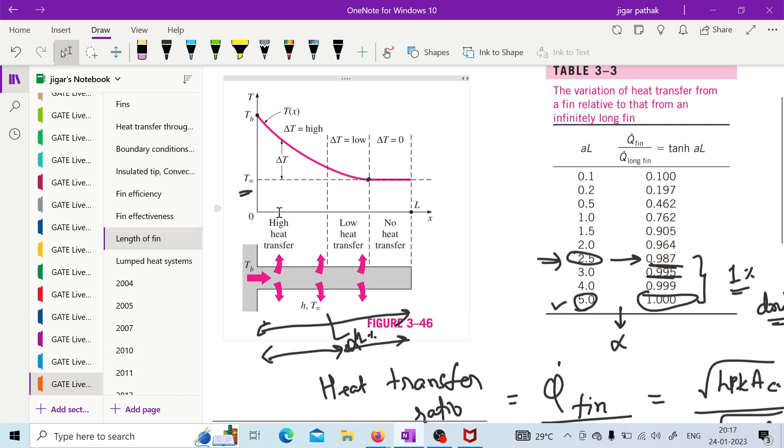Okay, sir, going for infinite length. Okay. Yeah, so tell me what is your answer here?

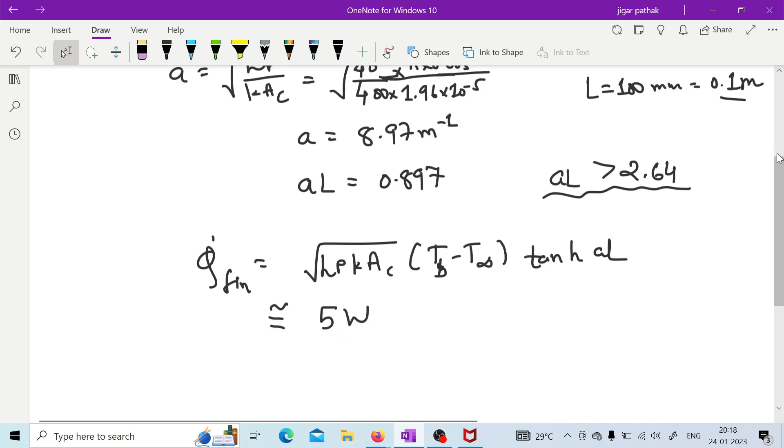Anyone? So would it be 5? Yeah, it is almost 5 watt, right? So your answer will be 5 watt. And this is given here.

So the next is a spherical steel ball of 12 mm diameter is initially at 1000 Kelvin. It is slowly cooled in a surrounding of 300 Kelvin. The heat transfer coefficient between the steel ball and the surrounding is 5, over the thermal conductivity is this 20. The temperature difference between the center and the surface of the steel ball is. Can you calculate this one?

Actually here you need to first understand the question and then you can attempt this one. So what do you think? Can anyone tell me how can we approach this question?

So first should we calculate the Biot number? Yes, correct. You should calculate Biot number in order to get an idea of which resistance is higher. That will be understood from the Biot number. So calculate that Biot number.

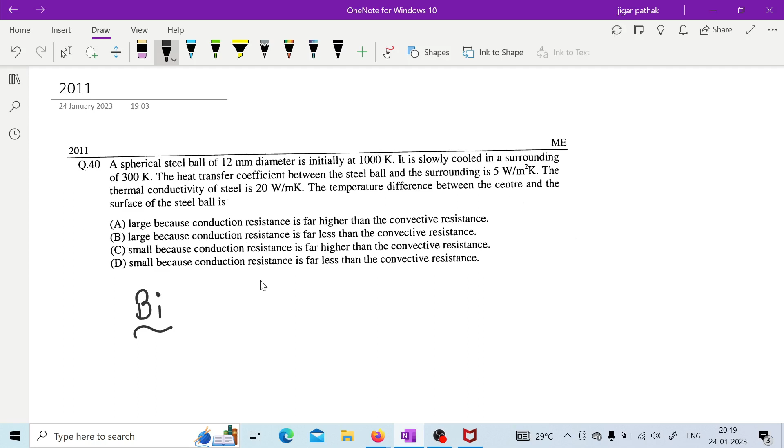What is Biot number? HL by K, yeah, you will have H LC by K. What is LC? Volume upon surface area have to calculate, right?

So here it is a spherical steel ball, so it will be d by 6, right? Pi by 6 d cube upon pi d square. So h by k will be as it is, pi by 6 d cube upon pi d square.

So h is, but you need to convert it into meters, right? h is given as 5, k is 20, 0.5 sir, byte 2 number, into 10 raised to minus 3, 2 into 10 raised to minus 3, right? So it is, yes sir. 0.5 into 10 raised to minus 3, it means 0.0005. Yes or no? Yes sir.

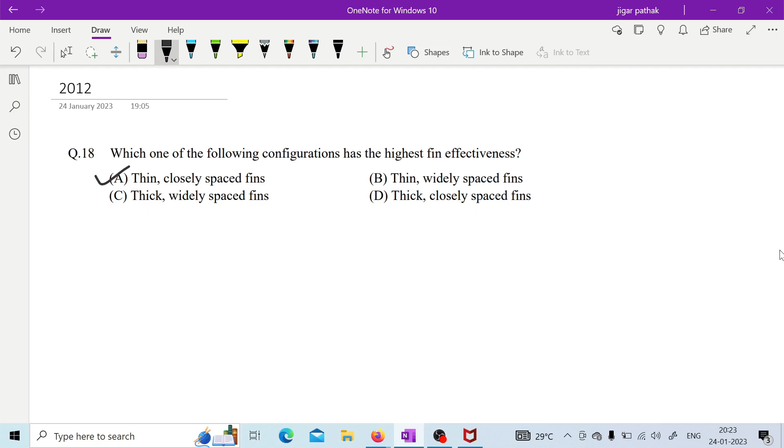Why? Because thin will give higher surface area, and by placing them closely we can arrange more fins. Actually, you can provide it in terms of some mathematical form also. As we have discussed, effectiveness is nothing but heat transfer with fin and without fin.

And for that, if you further simplify, we have considered, for a long fin it is kp upon hA. So here actually this effectiveness is proportional to, inversely proportional to the under root of this area. So if you are going to provide this thin and closely spaced fin, then in that case you will have the highest effectiveness. Is it okay?

Yes sir, okay. So for lower value of cross-sectional area, it must be thin, right? Then only effectiveness can be higher.

Widely spaced fins, sir. So in case of widely spaced, you may not have that perimeter, which is also an important thing. So if you widely space it, then total surface area available in this perimeter will be less. So that is why widely spaced is not correct.

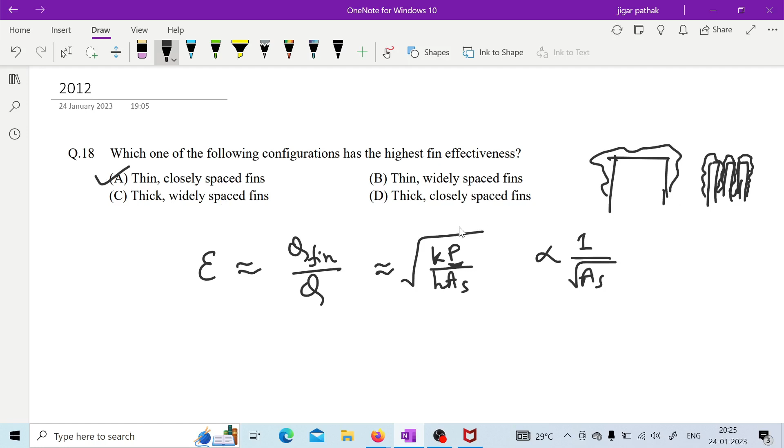Are you getting? Perimeter will be much more in case of this thin in consideration with this thick, right? Are you getting? Yes sir. So that is why thin and closely spaced fin is correct. Are you getting it? Yes sir.